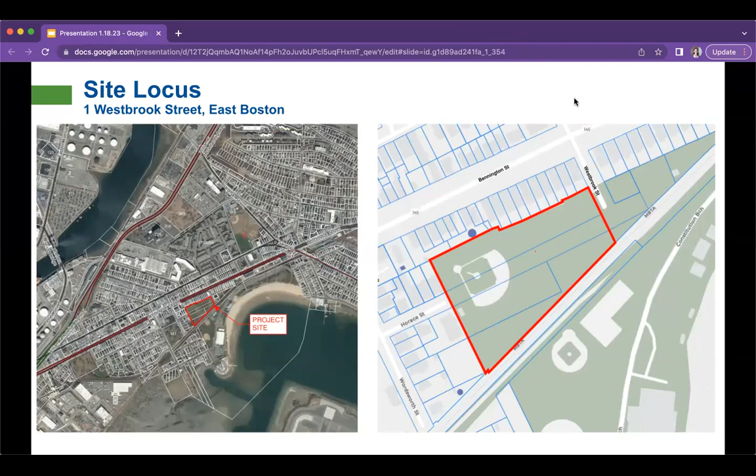Why we're here today is because the site is located entirely within the FEMA flood hazard area, or land subject to coastal storm flowage. The floodplain has a base flood elevation through the site at elevation 16.46 Boston City Base. Based on the city's climate ready map, our site has a sea level rise base flood elevation of 19.5 and a sea level rise design flood elevation of 20.5.

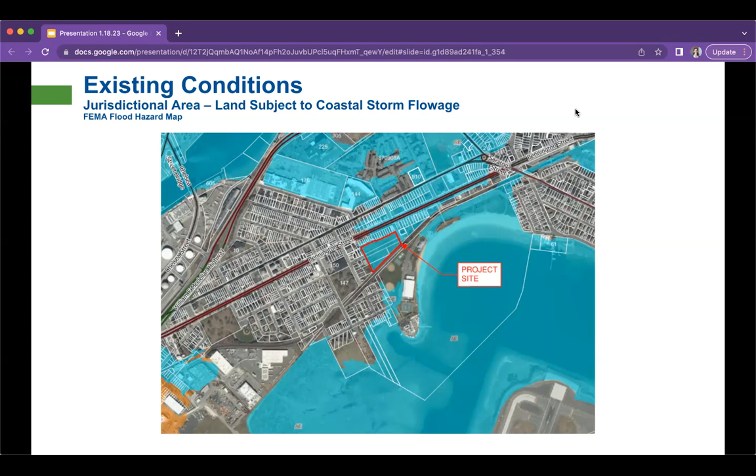Here's the survey showing the limits of the project area; the blue shade is the limits of the floodplain, which encompasses the entirety of the site. The existing site is comprised of a natural turf field, generally sloping from the southwest corner of the parcel to the northeast, toward Westbrook Street. The existing closed drainage system consists of catch basins and manholes, which capture and convey stormwater runoff to Westbrook Street. There's also a current maintenance building located along the western edge of the property, adjacent to Horace Street, that we'll be removing as part of the site improvements.

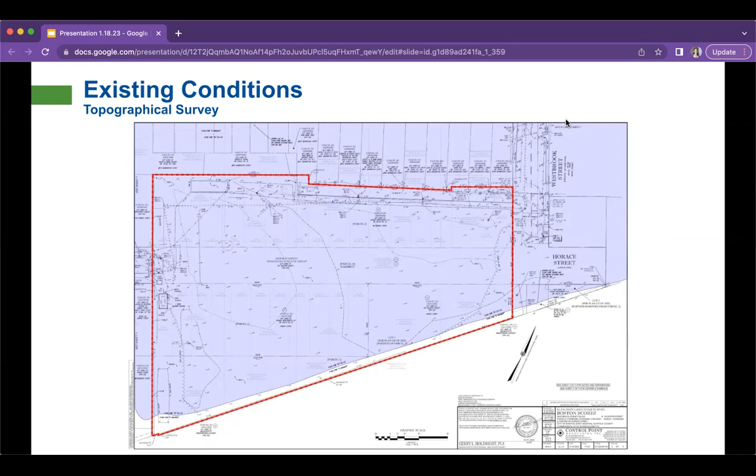So in talking about the landscape, now I'll hand it off to David Warner, the project landscape architect, to talk about the landscape and the site layout.

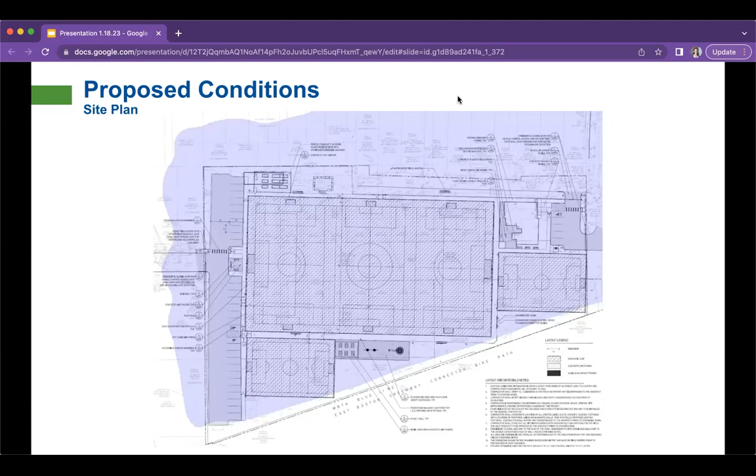Thanks, Josh. I'll briefly discuss the proposed conditions—this plan is simply an overlay of the floodplain on the proposed conditions. Starting with the site, it's pretty open overall, but there's a little vegetation that's crept in from the west and east, largely invasive species. That vegetation will need to be cleared in order to develop the site.

The plan shows the 3 synthetic turf fields that Josh mentioned—1 primary field and 2 supplemental fields. Those are comprised of synthetic turf and sand and organic plant-based infill material, as we know from the draft order of conditions that's been circulated. The vendors we're sourcing this material from will be able to comply with those criteria. Those are permeable surfaces on top of stone, so all the water that falls onto them drains straight through into the subsurface collection system, as does the playground, highlighted in blue there.

Josh mentioned the outdoor classroom, which is that little area to the north surrounded by a small grove of trees next to the community garden. So we've got a lot of permeable surfaces here that will absorb the rainfall that lands on them. As far as the number of trees proposed here, I think we have 31 proposed trees in this area. The plant schedule also includes planting to be installed around the building—that's not part of this notice of intent, but 31 proposed trees are part of this plan in this area, to answer that question.

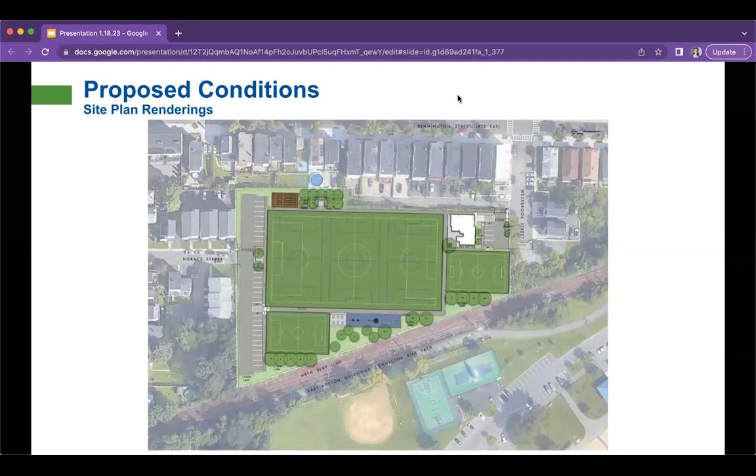Thank you, David. So I'll just go over briefly what the support building will be used for. The building will house several restroom and changing room facilities, a small family restroom, and a small shower facility. It'll also house a storage component used to store field materials as well as the maintenance equipment for the field. And we're working with Boston Scores to provide all the infrastructure they need for their maintenance equipment to be electrified, none of it petroleum powered.

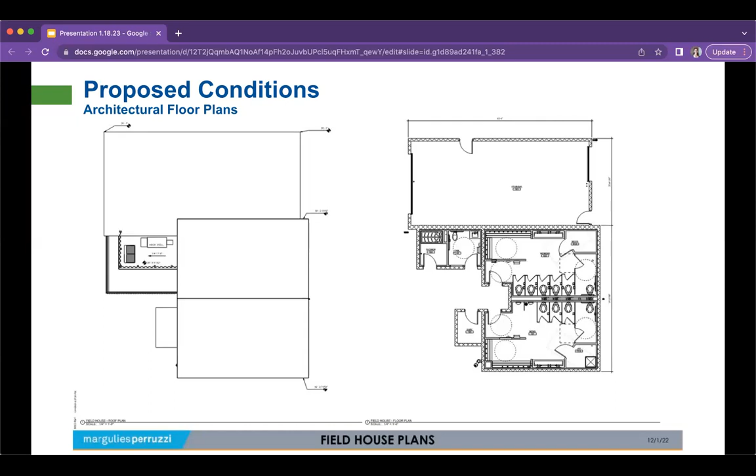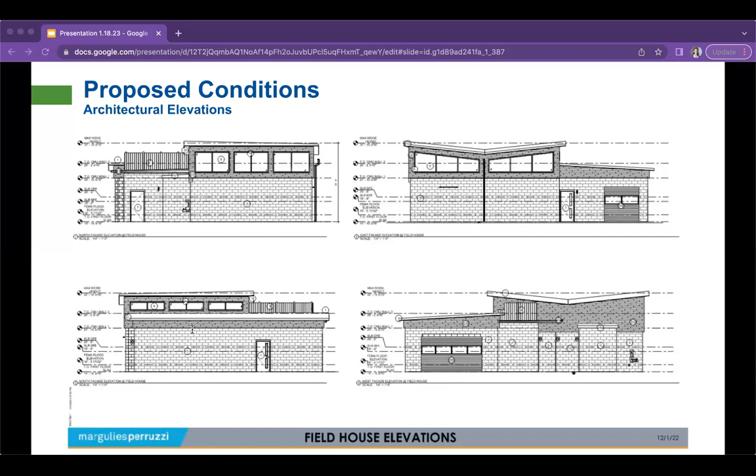You can go to the next slide. So the building elevations demonstrate where the overall flood elevations, the design flood elevation, as well as the sea level rise elevation fall within the building. We've used flood resistant materials for the structure and finishes on the exterior and interior of the building. Throughout that first 10 feet of the structure, all of our mechanical equipment will be mounted in the roof ceiling structure, and exterior equipment will be mounted on top of the building. Next slide.

And Josh can talk a little bit more about the drainage and stormwater management. Okay, thanks, Josh. Yeah, coming full circle here to wrap up and discuss the proposed site utilities and stormwater management system. Like David said, the goal of the project was to provide as much permeable surfacing as possible, knowing that we are located within the floodplain and want to promote as much infiltration and flood storage as possible.

So located adjacent to Horace Street along the entire western edge, we are proposing a porous asphalt system, which has been designed to detain and infiltrate up to the 100-year storm event. We do have some proposed water quality inlets located at low points in this parking lot that will only really function during an emergency overflow event, or should maintenance impact the integrity of the system. So we have that portion of the site tying into some existing drainage infrastructure that we are going to maintain, which is being routed around the perimeter of the site.

And then as we move towards the center of the field, or the center of the site, we have the large play field area and the smaller accessory field below that. All the synthetic turf fields are underlain by an extra reservoir course for extra detention and infiltration purposes. Any overflow will discharge to the larger diameter solid header pipes along the edges of the field, where they'll continue working their way east, where the drainage system will tie into the other porous asphalt parking lot located off of Westbrook Street, where all the stormwater ultimately discharges to the existing main in Westbrook Street.

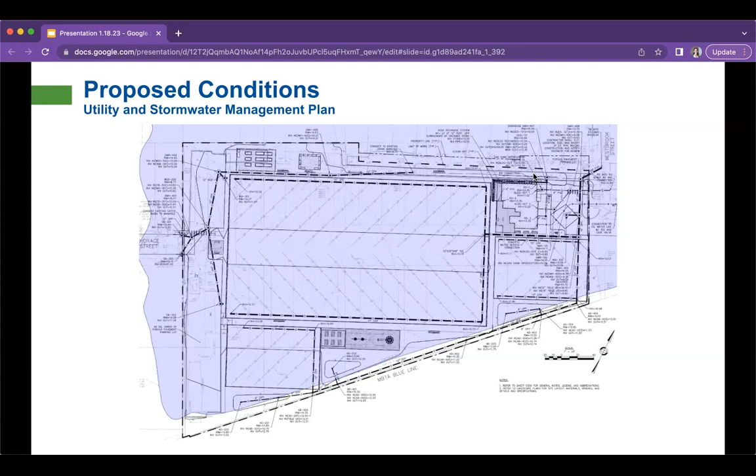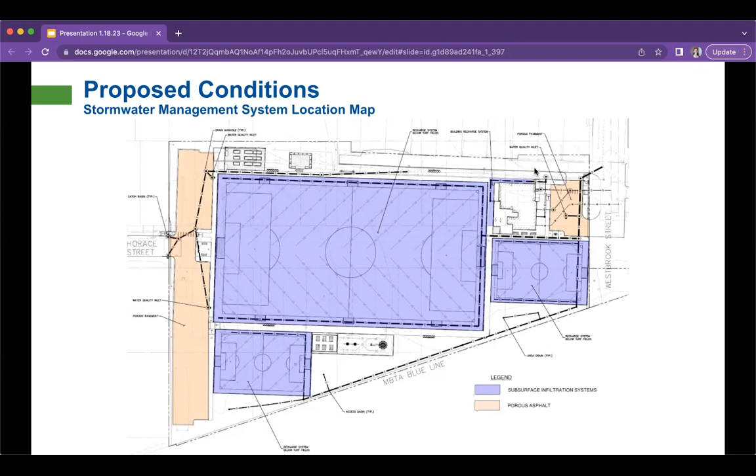If you go to the next slide, please, you'll be able to see more clearly where we're proposing those porous asphalt systems. They are highlighted in the peach color, and the blue color represents the underground infiltration system beneath the turf field, and also a perforated pipe, a below ground perforated pipe in a crushed stone system that captures the roof area of the new accessory building. So with that, we'll just open it up to questions and comments from the commission.

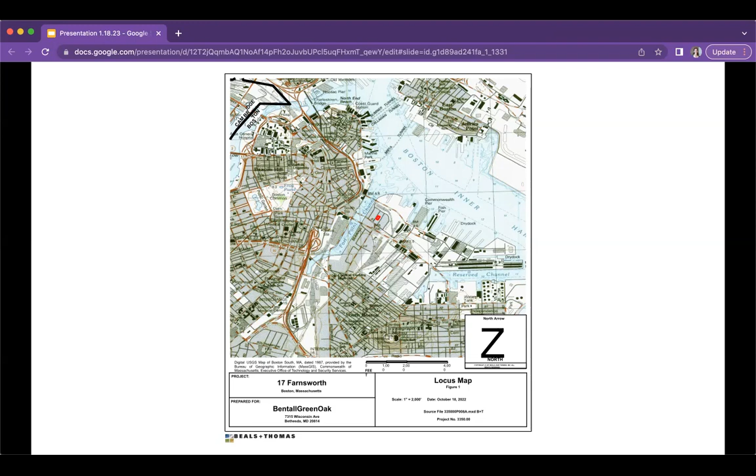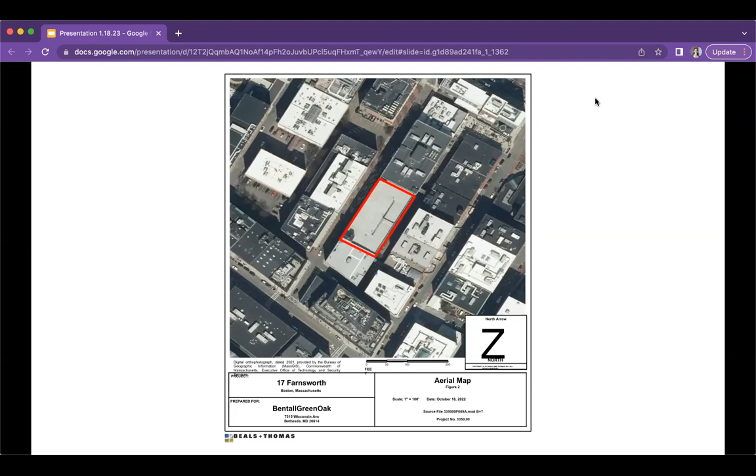This is 17 Farnsworth Street, the existing parking garage. It's accessed from Farnsworth Street to the west, and on the east it's bounded by a private alley, with buildings to the north and south.

These are existing photographs of the garage. The top two show views from the north and south, viewed from Farnsworth Street, and the bottom two show the view from the alley on the backside, again from the south and north.

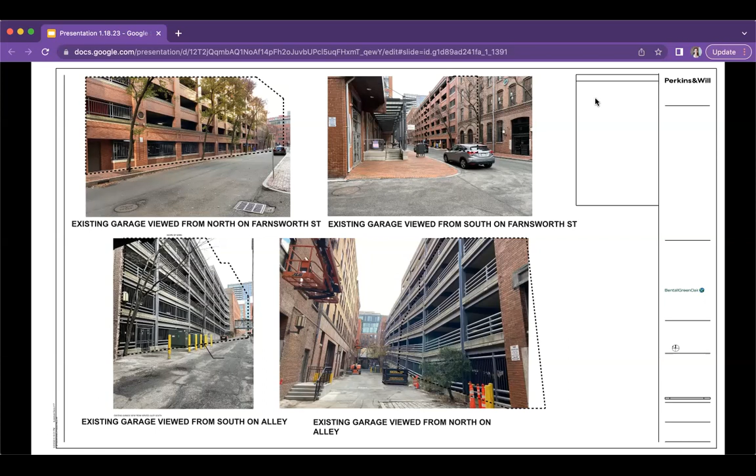This is the proposed building, the 4-story lab office building. It's about 78,000 square feet of space.

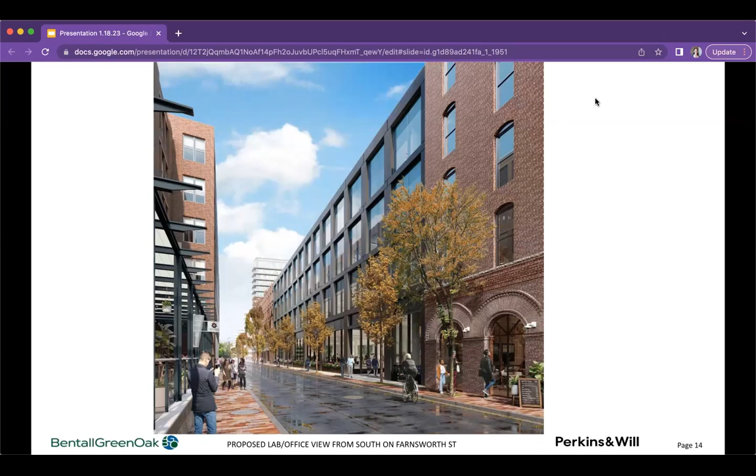Farnsworth Street is at the bottom of each of these views of the building. We are planning to demolish the existing building completely, take out the existing brick sidewalk, and remove the current garage access from Farnsworth Street. We'll replace it with a concrete sidewalk with a permeable paver strip along Farnsworth Street. We're taking out the 4 existing Callery pears and replacing them with American hornbeam, which will also have ground cover at the sidewalk level. Against the building, we're showing planters underneath the building overhang.

On the roof, the second plan on the bottom of the sheet shows the roof planters that we have.

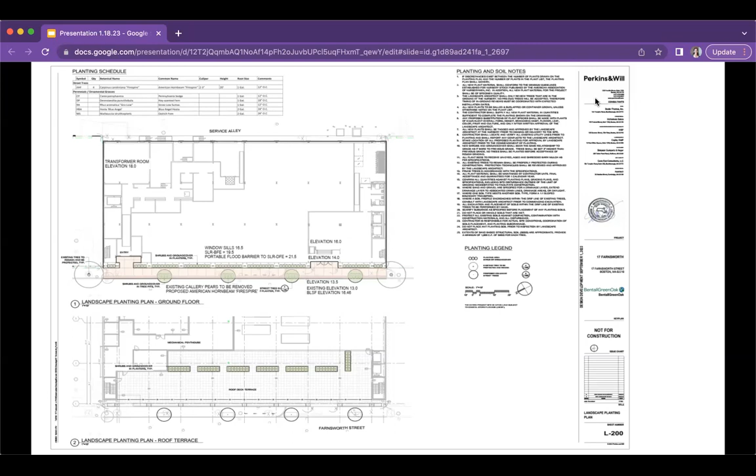The low point of the sidewalk right now is about elevation 13, which is about 3.5 feet lower than the existing 100-year flood elevation. So we are putting in a new curb line there, and we're raising the sidewalk so that at the two doors you see on Farnsworth it will be raised to elevation 14.

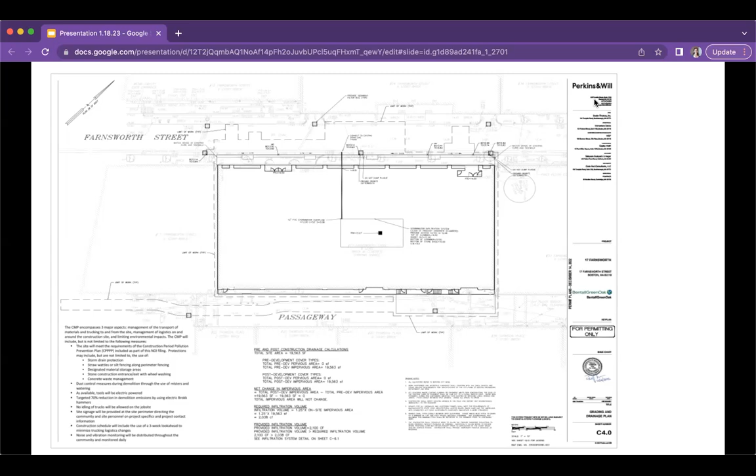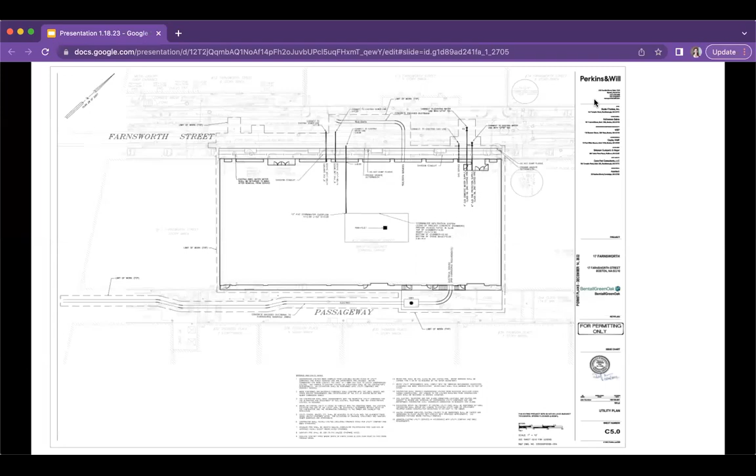Other documents you're going to find in the filing are the BPDA climate resiliency report, the stormwater management report with construction period pollution prevention plan, a geotechnical report, and other plans from the plan set with details on the stormwater system that's under slab, architectural plans, and the landscaping plans. And that concludes this summary of the project.

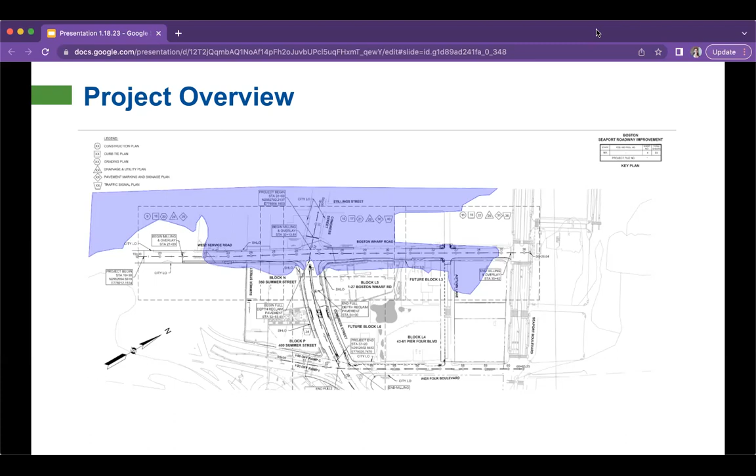Next slide, please. And this is the Summer Street Bridge, which is actually elevated about 20 feet above the floodplain. But just to ensure that we captured everything that may be of interest to the commission, we included this in our application. The Summer Street Bridge is undergoing bridge improvements, including construction of a median and some sidewalk improvements that improve pedestrian access and accessibility. Next slide, please.

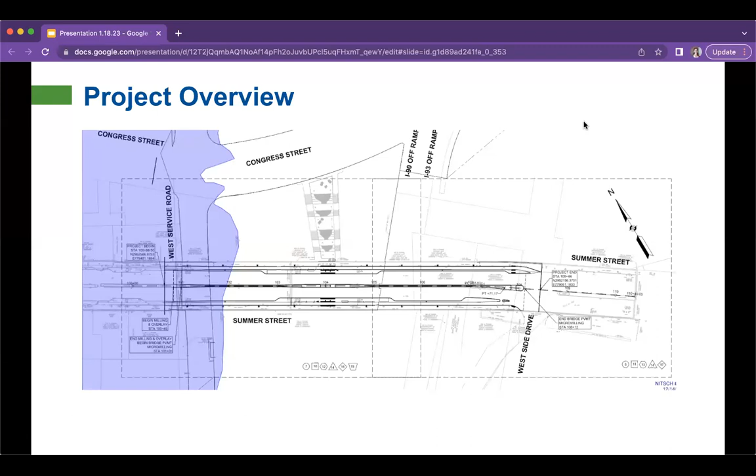As far as introducing some greenscape to the project, we are proposing the reconstruction of the Congress Street median that falls between blocks L5, L6, and parcel N and P. Within this median, which is currently all impervious concrete, we are proposing 11 green ash trees, 25 shrubs, and some grasses and perennials. It's going to be similar in nature to what you've seen over on Seaport Boulevard in the last couple of years with the median improvements conducted over there. Again, it's going to tie the entire Seaport Square together and show continuity between the different parcels. Next slide, please.

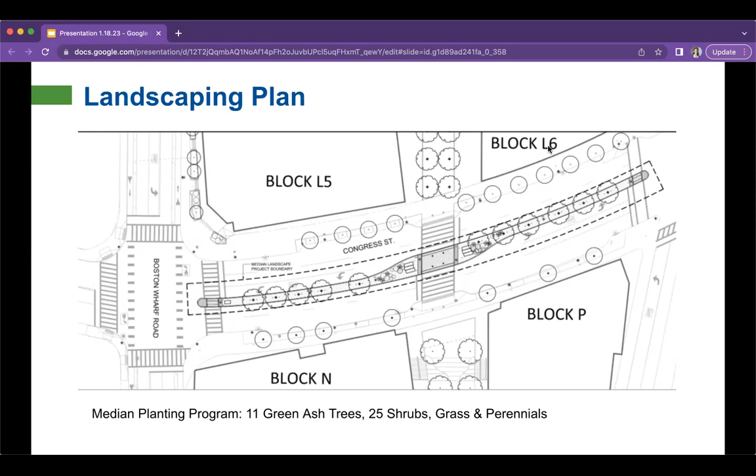As far as the scope of work goes, this is West Service Road, where we're proposing cold plane and overlay, some curb replacement, some minor sidewalk reconstruction in the area in front of the Postal Service parking lot. And then the areas to the right that fall within, in front of parcel N, that was again permitted through your commission in the PIC a couple of years ago.

Here at the intersection of West Service Road and Boston Wharf Road, we're proposing new crosswalks, as well as cold planing or cold milling and overlay, and new traffic signal improvements as well.

As we progress down towards Seaport Boulevard, it's a cold plan and overlay, some accessible ramps. The highlighted area in the bottom left is parcel L3, which will have minor improvements done there, but when that parcel comes to design, we'll be back permitting that through the Public Improvement Commission and coordinating with Kate England as to the green infrastructure that will be incorporated into that parcel.

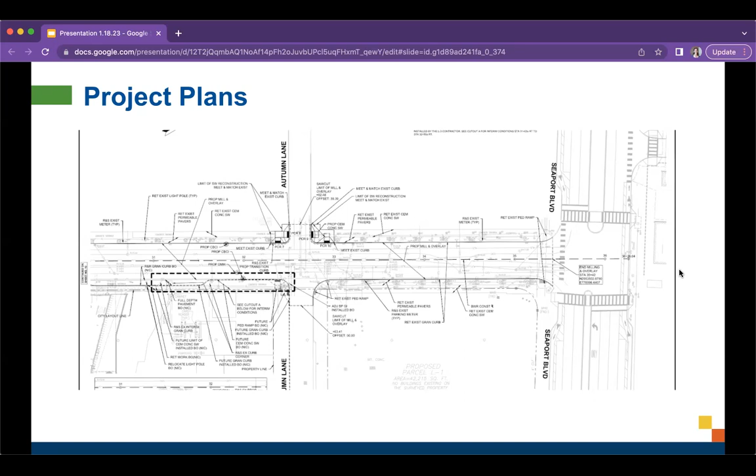This again is a view of the improvements on Congress Street, where in this application it's really just the median itself, but to the north of Congress Street, that's parcel L5, which is not yet started design, but when we start that design, we'll be coordinating green infrastructure with Kate England as well as with the Public Improvement Commission.

This application is presently before the public. We're in the process of going through Public Improvement Commission permitting. We've done the notifications. We still have several agencies to hear from, but we hope to be on new business in late January and February and have the permits in hand by the end of February.

As far as erosion controls for this work, this work is all within the public right of way, primarily curb to curb. So we'll be incorporating silt sacks in the catch basins. Trenches will be plated. We'll do street sweeping on a daily basis. We're going to be using rubber tires as not to damage the asphalt, and no materials will be stored within the floodplain area.

Maintenance for this project at the end of the day will be the responsibility of the Boston Public Works and Boston Water and Sewer, because again, this work is all within the existing public way. And that concludes my presentation.

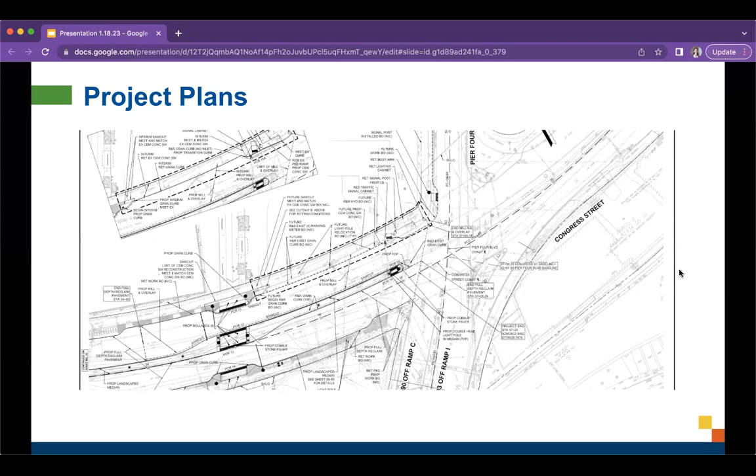Okay, just a couple quick questions. Are existing trees being removed? There are no existing trees that are being removed, but we are proposing 11 new trees as part of this application. Okay, and I'll let Commissioner Wilson handle follow-up questions on, it looks like you're planting ash trees, and maybe he or Allison have some other recommendations.

So with that, I go to Commissioner Sullivan. Hey John, on the trees and then any of the bump outs, you mentioned you're going to go to PIC, talk to Kate England. Are those trees going to be taking any street water for green infrastructure? That was actually part of the conversation with Kate. And unfortunately, the median is the high point of the roadway, so everything slopes away from the median. So that's not really available for this application. Unfortunately, no street water will be going into the median.

Right. Is there anywhere that you're proposing to do it, like when you had some of the bump outs in the sidewalks? I couldn't really tell. There are really no bump outs on the sidewalks. They're pretty much maintaining the curb line, except for where we have crosswalks that are all encompassed by ramp.

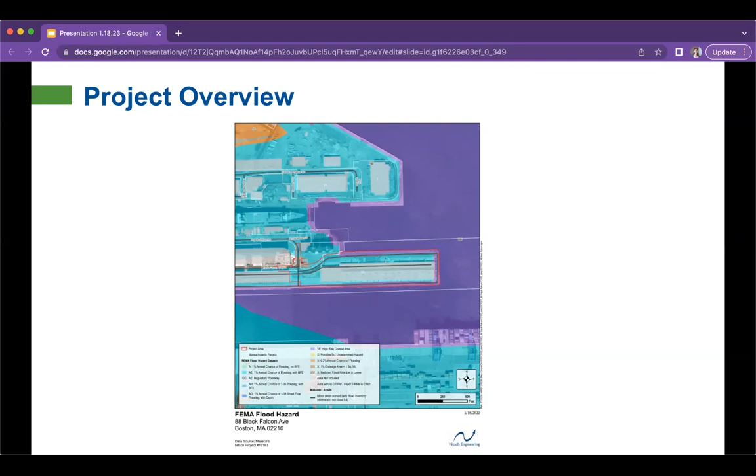This is an overview of the plan to give you a perspective of the improvements we're proposing at the westerly end of the site. A majority of the improvements are at grade or at the westerly end, and everything right to the building face is essentially on pier.

Would you mind going back to the original slide, the original rendering?

So the existing building, built many years ago, has a first floor elevation of 22.8, which is great because the design flood elevation determined by the BPDA at 2070 is 21.5. So even at 2070, the first floor of the building will be above the flood conditions. All the proposed utility improvements, the electrical vault and things like that, will be raised to the first floor or higher, so nothing is proposed below grade or at grade.

Under the existing first floor slab at 22.8 is crawl space, so there's really nothing happening under the building. There's nothing to be concerned about protecting, because it's basically a crawl space under the building.

Can we go ahead two slides, please?

This site, as you know, is an active port. The cruise terminal operates seasonally during cruise season, and that's on the west.

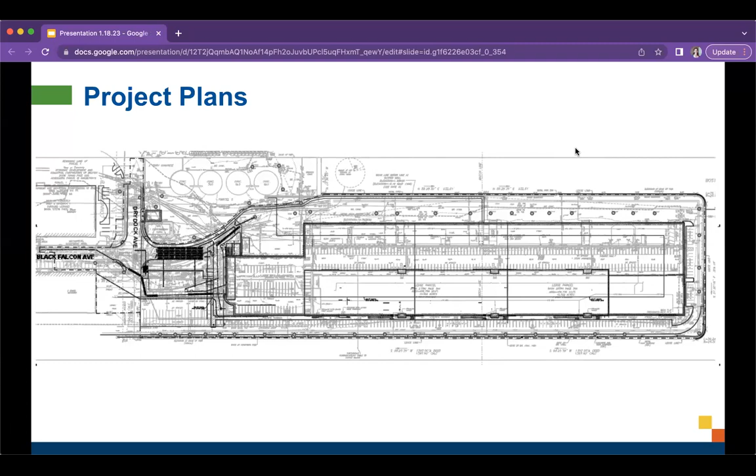Can you go ahead two slides, please? Okay, let's go back, I'm sorry. I'm sorry, I'm making you crazy.

The reason these are movable planting beds is that during cruise operations, these trees have to be removed temporarily or set aside so traffic can flow through the site unimpeded. There is a lot of traffic that serves this facility during cruise operations -- buses, cabs, people dropping off passengers.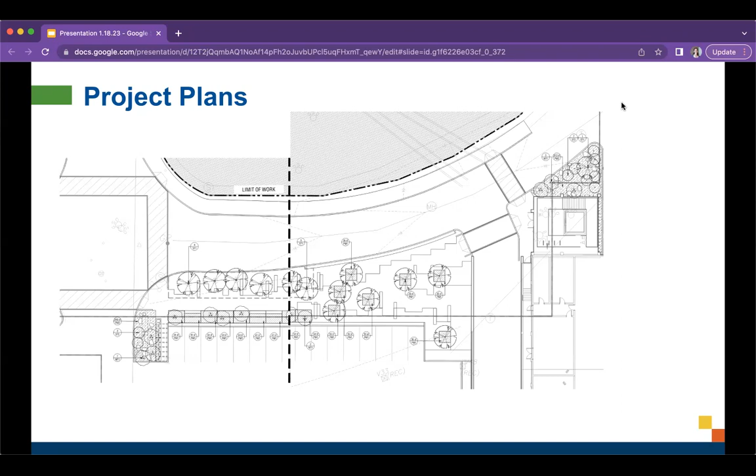This work also includes intersection improvements, because we are rebuilding the driveway and removing the intersection. Right now, there's a ramp that starts at Dry Dock Ave and goes up to the building, to the second floor parking deck. That ramp is being reconstructed and will run parallel to the garage, so traffic will be improved. Vehicles will pull into the driveway and take a right where you can see that first crosswalk in the drawing, and that will be a ramp up to the second floor deck. In the area of the existing ramp, we will be expanding the parking for Black Falcon operations.

You can see a small box too, that's Coastal Cement. Not a part of this application, but will be part of a future application. Part of this work requires us to reconstruct the Coastal Cement building up head house, so to speak. That's something we'll be coming back to you with in the future. These things are all tied together.

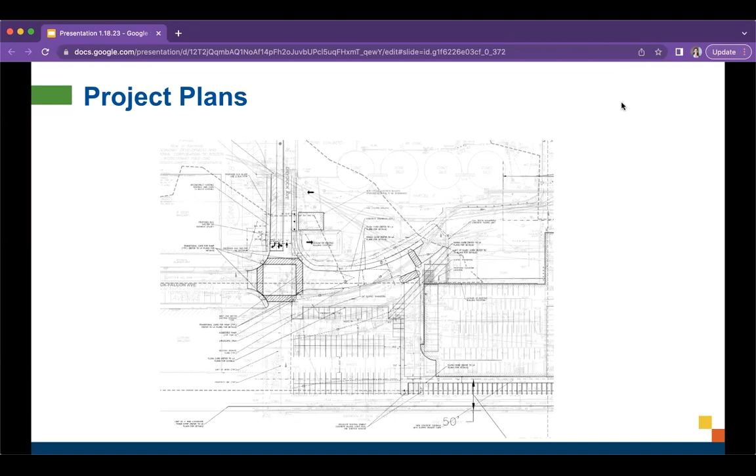As far as utility improvements go, right now all the stormwater on the site goes into catch basins and discharges into the harbor, and the building roof runoff also discharges directly into the harbor. We are proposing stormwater collection and recharge for the area of terra firma we're disturbing for this project, about 46,000 square feet. We're collecting 1¼ inches of stormwater runoff and recharging 4,700 cubic feet of stormwater in 500 linear feet of 42-inch perforated pipe. That's what the rectangle structure is, under the proposed driveway.

We are also relocating the master water meter, which is currently in the middle of the intersection of Dry Dock and Black Falcon Ave, into the parking lot. That will improve access for Boston Water and Sewer when they need to inspect that manhole, and for others as well. We'll also be running a new electrical service and a new sanitary sewer service, and some other minor utility improvements, new catch basins with deep sumps, that sort of stuff.

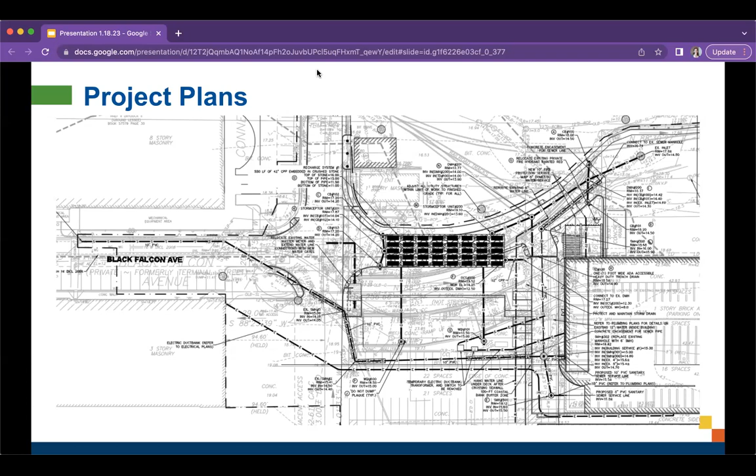So the proponent had asked for language for number 30, which gives the commission the right to enter the property for purposes of inspection, and you had asked for subject to reasonable site safety rules established by the project contractor. I guess I'm thinking that is probably not necessary to add as language. Is that something you feel strongly about?

We just don't generally change our language. I defer to my client on that. I think the intent was that we don't want someone just showing up if it's an unsafe site. So we want to make sure that the site is safe for them, so there's no potential incidents or accidents or anything like that.

I think that goes without saying for our staff, that you report to them, and they'll make arrangements to come at the proper time. That being said, if he does have word that there's some violation, I think he has the right to have you guys make sure it's safe if he needs to inspect right then and there. So I think leaving that language as is without that suggested language is where I would land.

So I defer to my client to see if that's acceptable. I also wonder at this hour, could we have these conversations directly with staff where we can walk through them in a more thoughtful manner?